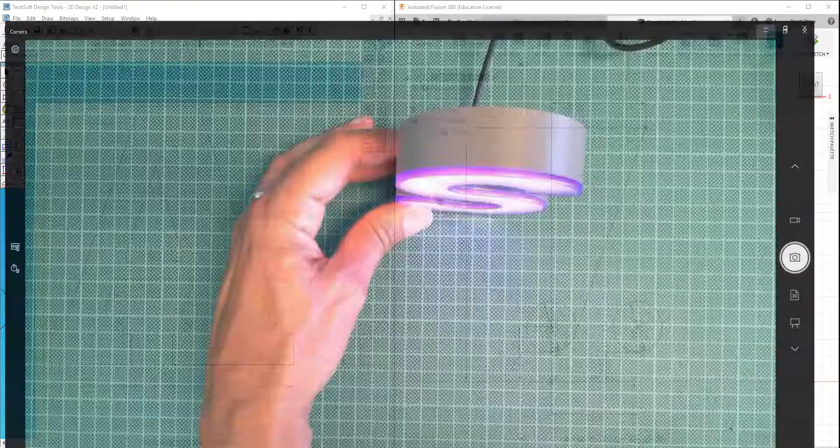So I'm now into my fifth video in which I'm trying to create another LED letter here with a laser cut front, acrylic window and a 3D printed ABS kind of extruded body here, with the USB power there for the LEDs inside.

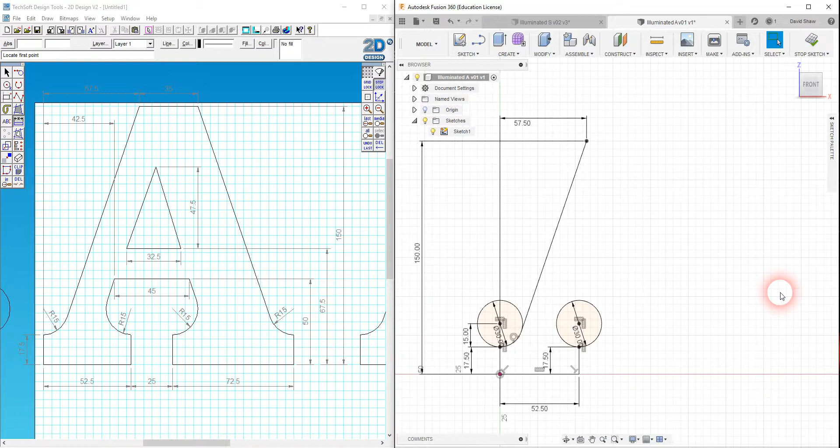So let's just go back to where we were in Fusion 360. In my previous videos, I'd made this more complicated serif A compared to the original sans serif S that I looked at, and I've just shown you as a physical model. And now with these dimensions in place on 2D Design, I'm now trying to recreate this as a parametric model in Fusion 360 for 3D printing, and this is as far as I got. It took me quite a while to get to this point, but the goal now is that I'm going to speed up a little bit, and we'll see this hopefully all coming together quite quickly.

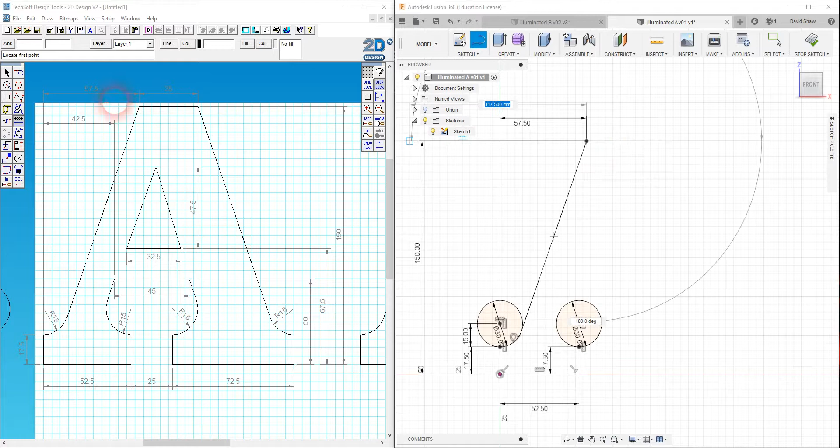So where am I going to go from here? I think I'm going to try and get the external profile all in place. Let's see if I can do that. I'll use some shortcuts now. I'm going to use the L key here on the keyboard to bring up my line tool. I'm going to click here. This wants to move horizontally across. I can see I've got this dimension line of 35 millimeters, so dial in 35 millimeters into the length of that line, and I'm good to go.

Now at this point, I'm not happy with the way that 35 millimeter dimension is beneath the line, because effectively it's going to be within the letter A. So can I click on that and drag it up? Yes, I can. I can drop it there. That's better. Okay, so just highlighting here how important it is that you've got this letter A fully dimensioned in 2D Design. And if I find there's some data missing, it's not the end of the world. I can simply add in the missing data in 2D Design and then apply it into my parametric model in Fusion 360.

Okay, now I've got this vertical line here, which is 25 millimeters out, and I've got this horizontal line. So let's try and do these. I'm back into Fusion 360, press the L button again. I'm going to draw a line there, which I can specify as 72.5. Again, I'm looking at that dimension, and for speed I'm going to stop highlighting it, but be aware that as I'm drawing things, these dimension lines are driving everything. 72.5, and what's missing is the distance between these 2 points, which is 25 millimeters.

So let's press D for dimension, and I'm going to specify the distance between the end of that first line and the start of the second line here is going to be 25. And as soon as I've defined that, interestingly, this is still not fully defined. Escape, let's click on this. I guess the problem there is that I can shift this up. Yeah, look at that, you see. I can shift that up there.

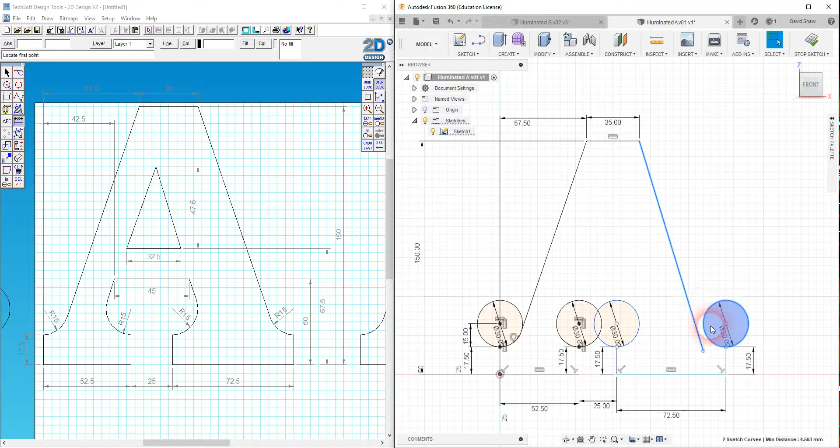Now I need this line to come down and intersect. So let's see, I'm going to get a line tool here. I'm going to draw a line. I'm going to take it roughly down to here. Right click, OK, and then I'm going to select, shift select, and in my sketch palette options I'm going to make that into a tangent.

Now look what happened there. It shifted that circle down. Rather than shifting the line across, it moved the circle. So I need to undo that. Let's just get rid of that sketch palette. And because this is not fully defined, it's blue, it decided to shift the circle first. Maybe it's because I drew the circle first, I don't know.

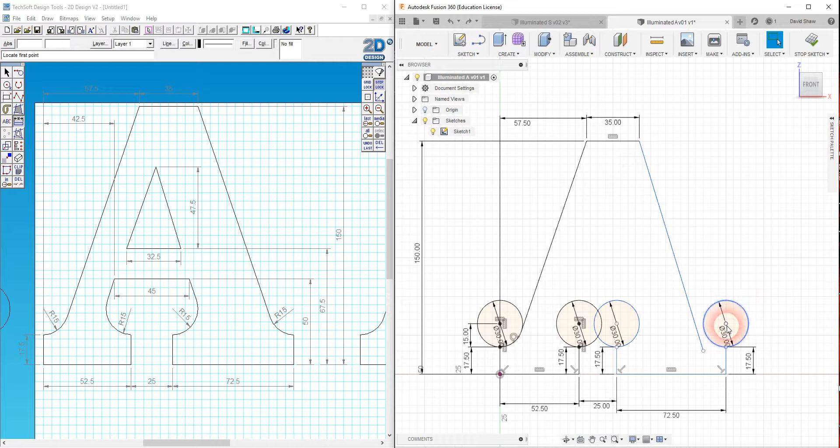So what I need to do here is make sure that this circle and this point and this point and this point are all horizontally aligned. There. No, why didn't that work? That circle and that circle and that, let's try that, are horizontally aligned. No. Okay, well this is strange. Let's just try one at a time then.

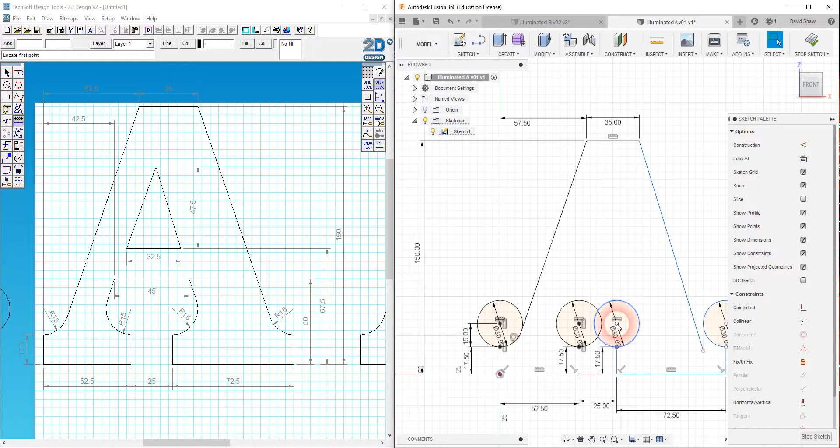It's going to be that center point, sorry, and that center point. Okay, is it this? And that center point and that center point have to be... No. That point and that point, horizontally aligned? Yes. And why isn't that fully defined? This was supposed to be a fast video, wasn't it?

Let's try this. That point and that point need to be... No, that point and that point, shift, come on, need to be defined like that. Let's try and take this, let's try and move it. It moves up and down. Okay, so therefore that point and that point parallel. Can I do anything with it now? Yeah, look what's happening here.

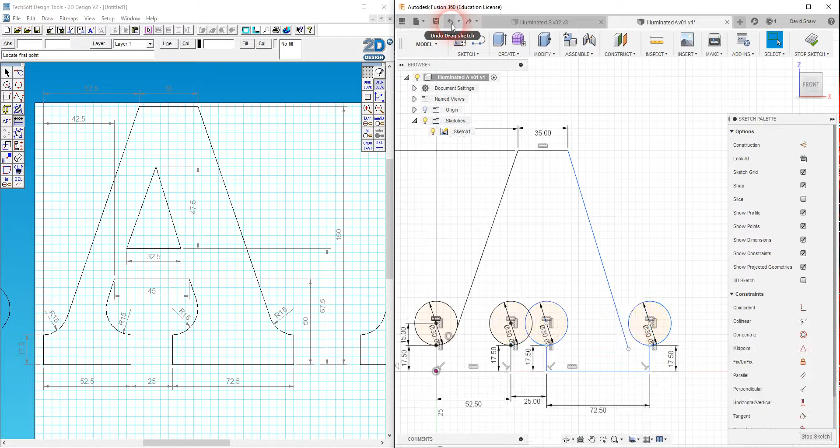That bottom line is not fully defined. Fascinating. Absolutely fascinating. So I need to make sure that this is fully defined. So can I take this and this? This and this, and make those. Yes. So I took that point there and made them horizontally constrained. Okay, well it is actually logical. It is, but you just got to work it through. Okay, hopefully you're trusting me on that one.

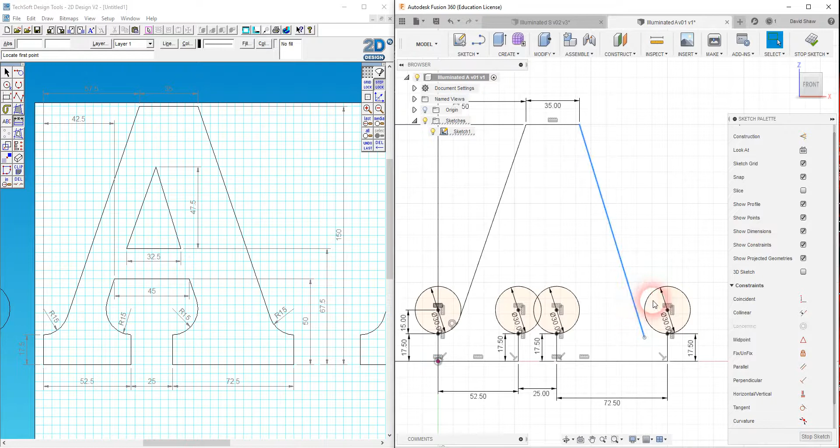Let's see if I can now bring this back. I want to select this line and this circle, and I want to make those tangents, and now it works. Yes, and now I'm going to make that disappear. Press the trim tool. I'm going to trim that line there. Hey, there we go. It's looking beautiful. Okay, magic.

Right, what am I going to do at this point? I think I'm going to go back to the trim tool, and can I trim some of these lines back? Can I trim that back? Yes. Can I trim that back? Yes. Oh, I'm liking that so much. And then let's see, I've got this point here. I want to draw this line. That's what I'm going to do. Let's draw that line. Okay, line tool.

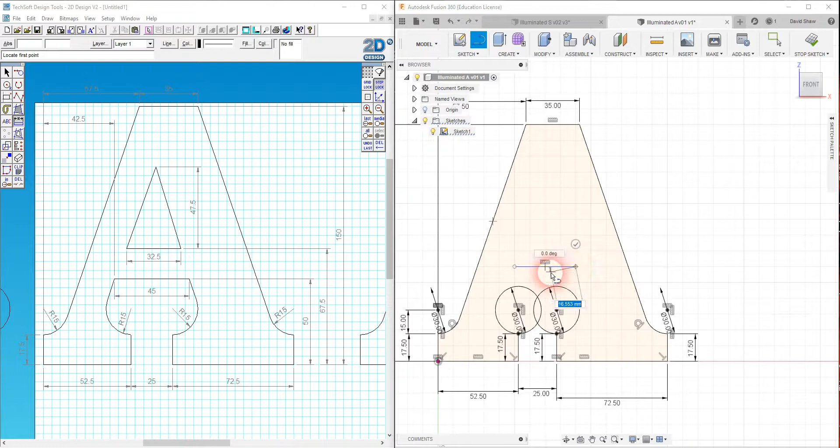I'm going to draw a line somewhere in here. Not quite sure. Oh, that's no good because it's wonky. Escape. Undo. Line. Let's try that again, shall we? Whoa. There were some funny things appearing there. Did you notice that? There were some funny details. Didn't like that. Undo it again. Got to be so careful with Fusion 360. There we are. Now it's horizontal. I've got that line there indicating it is constrained to the horizontal. Wonderful. Escape to finish the line.

Okay, dimension line. Now then, this wants to be 45 millimeters long, and this point here is 42.5. So it's going to be the distance from there to the origin. That distance there is going to be 42.5. And what I'm going to do, I think, I'm going to bring that line up.

No, stop that. I'm going to bring that line up to there. Okay. And I've also got this height being 50. Okay, so again, I'm going to go from the origin up to this line, and that is going to be 50. And that is now fully defined. It's turned black. Hooray! Now can I bring that dimension line up a little bit? Let's do that to there.

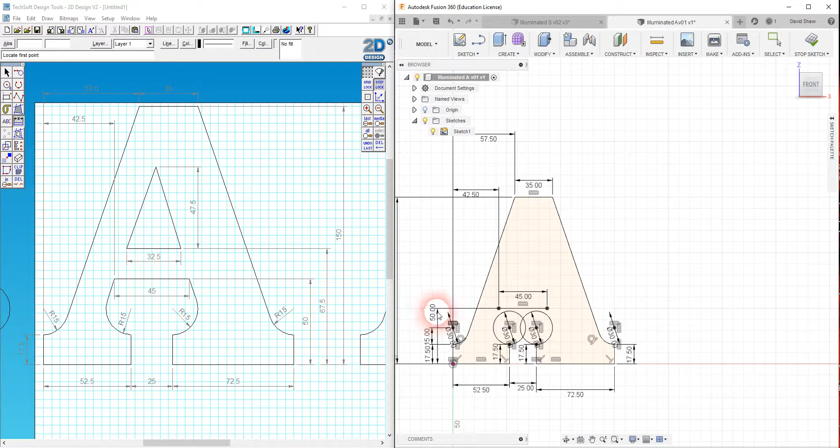Okay. Now I need to get a line in here, which is going to be a tangent. So line tool, click, and then, oh, look, that's so cool. If I bring it to that point, can you see it automatically detects the tangent? Oh my goodness, that is awesome. Yes! So I didn't have to do all this additional tangent work. I can just select there, bring it into the tangent. Oh, I'm liking that a lot.

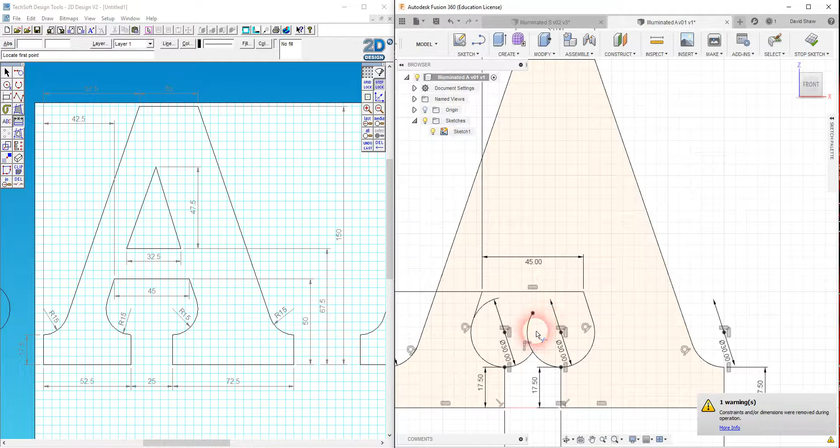Let's get the trim tool, T. Let's trim this back and trim and trim. I'm liking that a lot. That looks cool. There were a few dimensional constraint errors coming in there, but I think it's working itself out. The important thing here, if you've noticed, is I've got this kind of pale yellow fill, and that's showing that I've got a fully defined profile, and that's awesome.

I've got one little triangle left and I'm at 10 minutes. This is so very exciting. So maybe what I'm going to do here, let's just try and draw the whole flipping triangle. Let's do this. There, and close the triangle. Okay, and right click and okay. But that's not quite perfect. I still need to define some features to this.

So dimension line, this dimension is going to be 32.5. Let's bring that dimension line down a little bit there. The distance between this line and the top part there is going to be 47.5, and I notice here that this needs to be defined as well. The distance from there back to the origin, that needs to be set to 67.5. Okay, and I need to get this top point here, and if I look on 2D Design, this top point, I don't know its X position, so I've missed a dimension line.

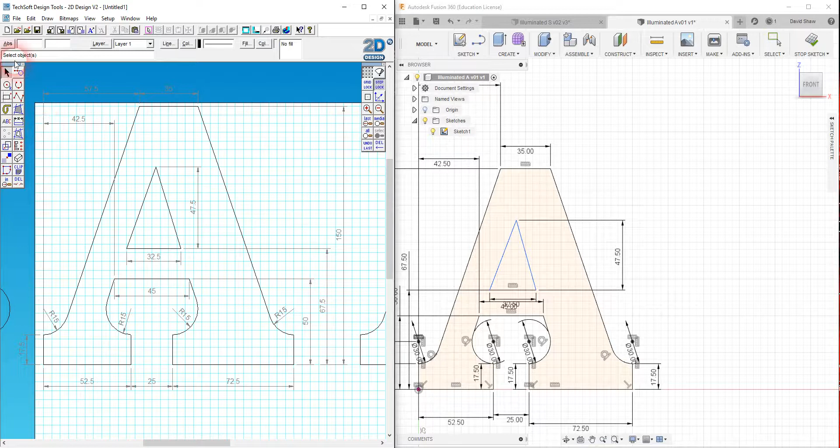So let's come back to 2D Design. Let's come back to that horizontal dimension line, and I'm going to do a horizontal dimension from here all the way up to that point, and let's see what I get. 67.5. I don't like the fact here the dimension lines have crossed over each other, but I think I'm going to have to just live with that. So final thing to do here, back into Fusion, press D. I want the distance from that point to the origin to be 67.5. Enter.

Now interestingly, it's moved the whole thing. The whole thing has shifted there, and again it's because I've not got the position here, have I? So on here, another horizontal dimension line between this point and this point is going to be 50. So back into here, dimension line, distance from there to the origin is going to be 50. There, and now it is fully defined. You can just see if I undo that, that dimension line just shifted it in.

Magic. So the fact that all my lines and arcs have turned black, it's a fully defined drawing. Means I can't pick things up and move things around. Everything's driven by the dimensions. And if I change a dimension, if I make that 20, well, did anything change? Make that 20. Oh no, failed to resolve it. Great. Sorry, I didn't want to do that. Let's just bring these down a little bit.

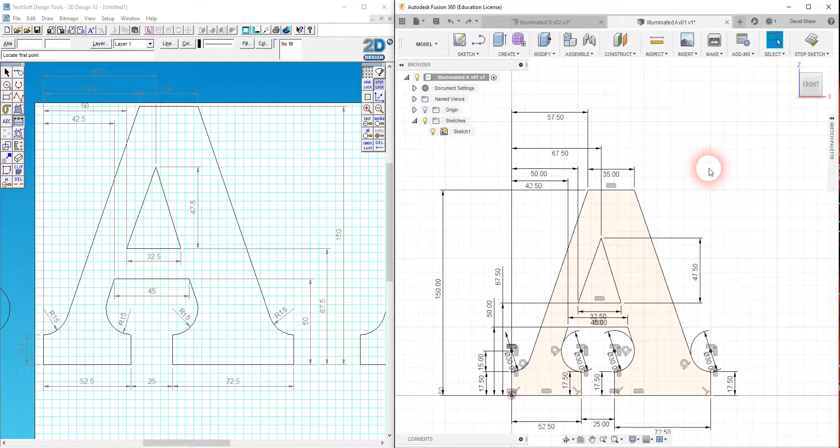14 minutes. We're good. Next video, we're going to be extruding this and making it into a 3D letter. Voila.